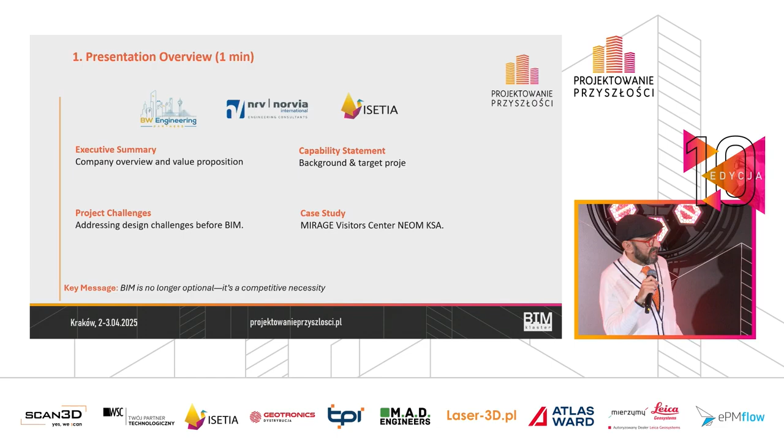I will go quite fast through the presentation and try to focus more on the case study. My presentation will be about 4 areas: an executive summary, capability statement, project challenges, and finally the case study for Mirage Visitor Center.

Again, Bonacci Winwood and Norvia, about 45 years of engineering consultancy, established in Australia, but we moved to the Middle East about 35 years ago. We've done many, many projects. This is some of our areas of specialty, some of the buildings and projects we've done, and this is in our portfolio. And that's some of the structural design we've carried out under BW Gulf in the last 20-something years plus.

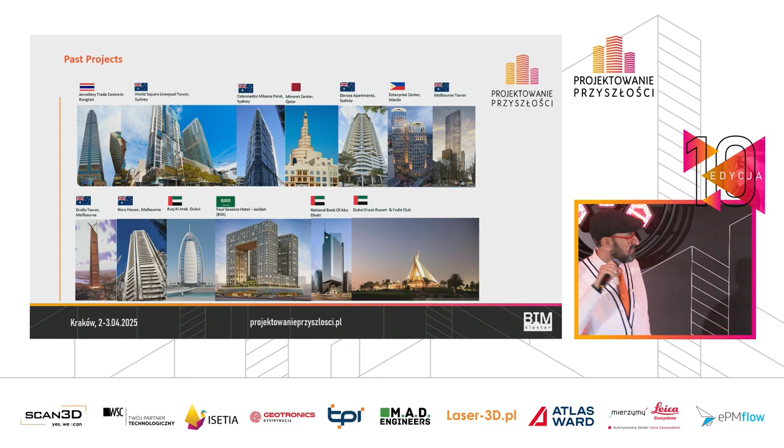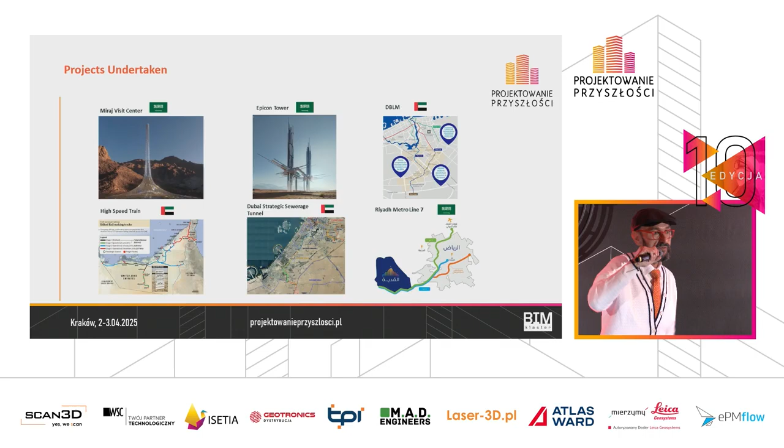This is the current on-hand design we are doing right now in the region. Today our discussion for the case study will be Mirage Visitor Center. And this is some of the projects we are doing right now.

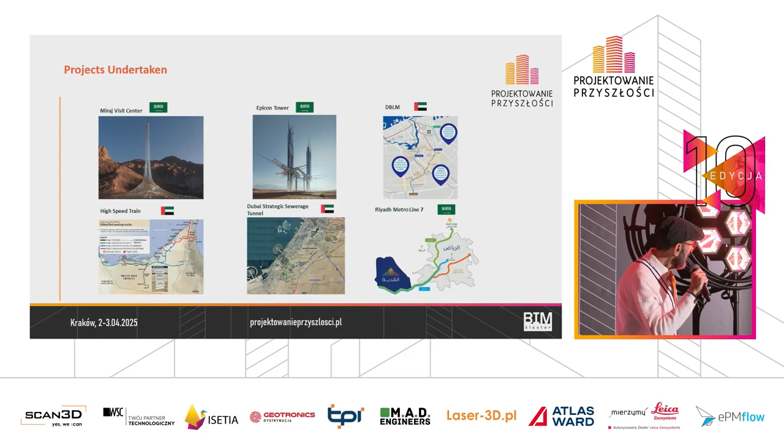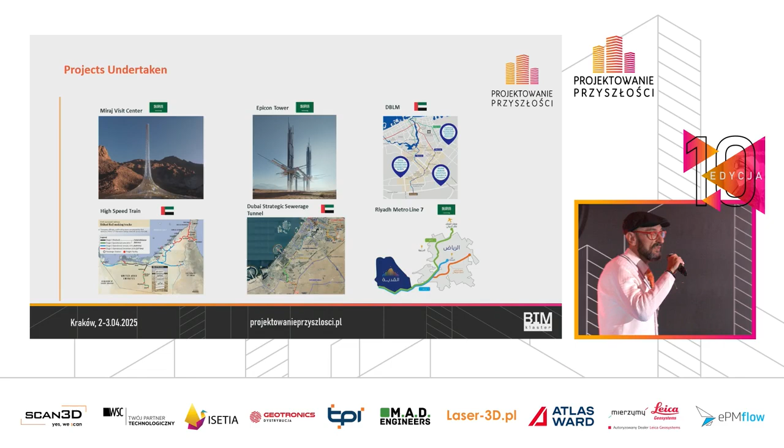We're doing the high-speed railway between Dubai and Abu Dhabi. We're doing the DST tunnel, a very strategic tunneling system under Dubai. And we're doing railway number 7 in Riyadh. Yes, we're doing the Epicon Tower with a private investor, assisting them, and this is part of Trojena.

Being in the Middle East for the last 20-something plus years doing these kinds of projects, we're all professional, we've all worked in engineering and construction. You could imagine the days when we started doing work, the amount of paperwork, fighting, sending emails, telephone calls.

We started with the brick. Who remembers the brick? The telephone, the brick. When it came out, I was the first one to buy it because we wanted to communicate with each other. We couldn't have. Then came the pagers, and before that, the faxes.

So all this, during that time, and then we started being introduced to BIM. It actually gave us a huge jump forward in trying to manage and operate our project, especially during design phases. Because our focus wasn't just on design—we came from an Australian background in engineering, and when you look at design, you want to make sure you could actually build the design you're designing.

It's so easy to put things on paper and then send it to the contractor, and then the contractor's team is standing there asking, how do we do this? What do we do? So you have to put yourself in their shoes at the same time and try to see how you can build and what you can deliver at this stage.

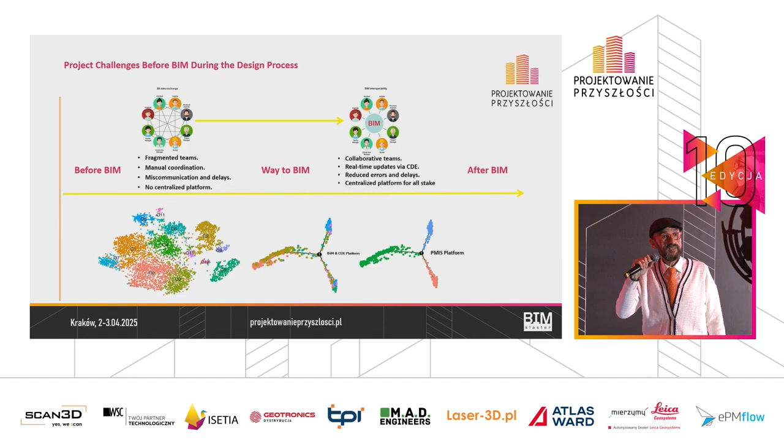Last week he called me and said, 'Bill, you know what, we're struggling. We haven't won a project since last year.' I said, 'What do you mean?' He said, 'Well, because now it's mandatory, part of the government, and in every tender we have to use a PMIS, we have to submit the BIM, we have to do this.' I said, 'Oh well, you told me it was a toy. I said, well, apparently those toys now are going to get us the job.' I said, 'Well, you better start moving.'

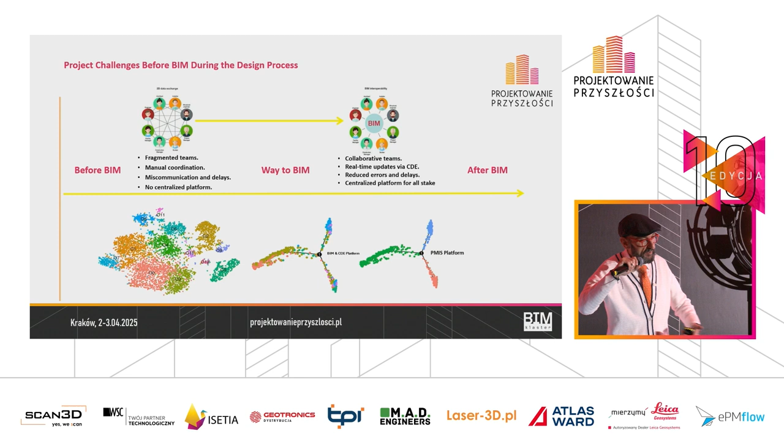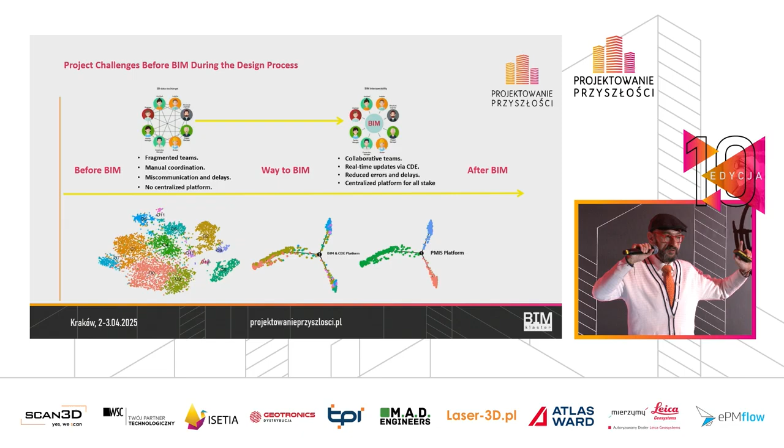So this is a kind of resistance in the culture in the construction industry. Now there are two gaps at the same time. The gap is between what we call an organizationally structured company and a family-run owned company. They have two different approaches to doing things. Usually the one who's struggling is the family-owned operated company, where they have a lot of difficulty embracing or trying to figure a way to move from traditional, the last 30 or 40 years of doing things, to what's been happening right now in the market.

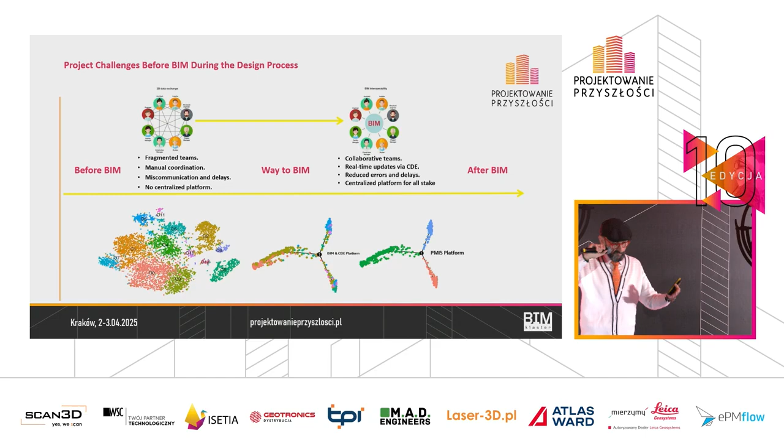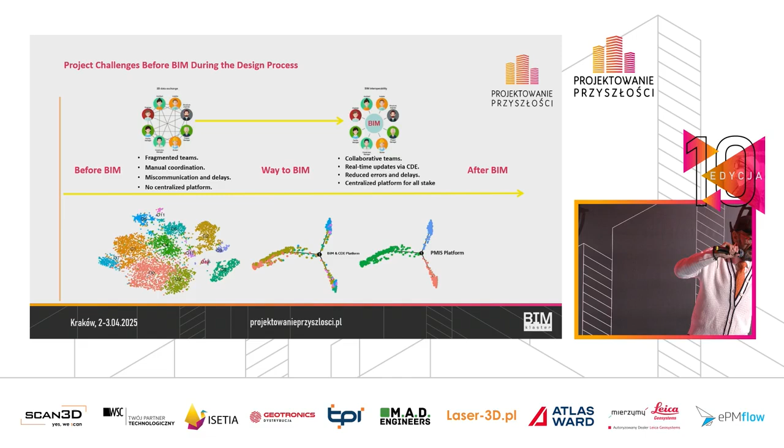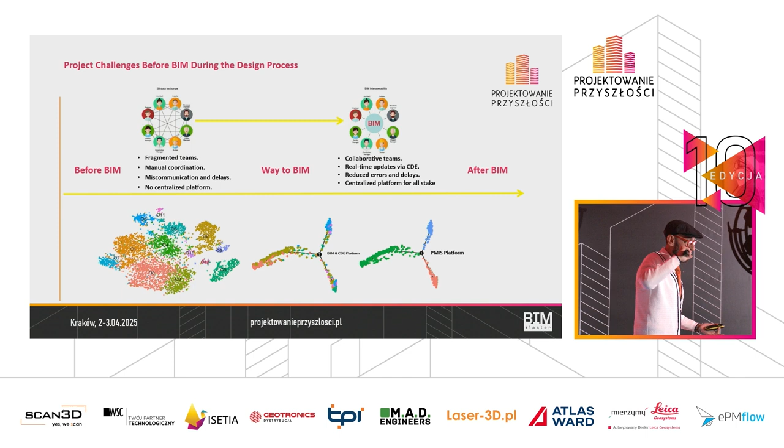I think there's a good opportunity for every business, and even for educational people, to try slowly to help them move on and adopt new technology, to BIM. But at the same time we have to prove to them the actual business case, that they are benefiting. They're going to make money out of that, they're going to save, they're going to benefit. Otherwise they're not going to do it, because they are afraid, and everyone is afraid of changes.

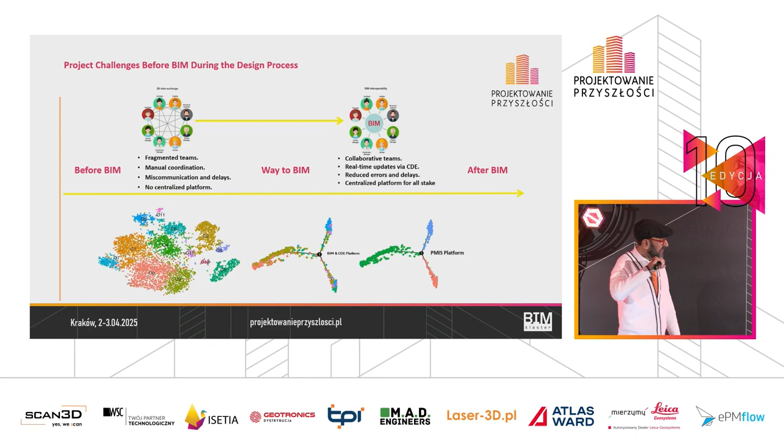This is a little bit of an interesting slide. I use the analogy back in the old days when we have multiple teams and we're trying to do things, and it's all fragmented and clashing. Then along came BIM. Even people said, oh, BIM we can solve it. No, BIM cannot even solve the problem for you. On top of BIM, yes, you could visualize things, you could design things in 3D, but again you still need to put this in a common data environment whereby you have everyone communicating, talking, exchanging, seeing, and updated instantly on what is going on in their project.

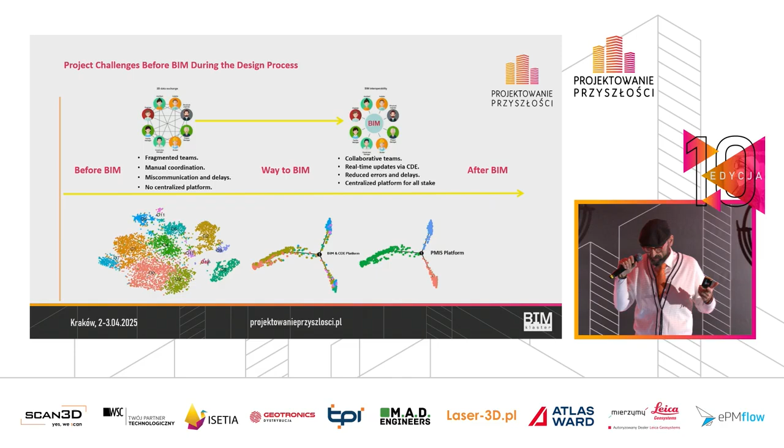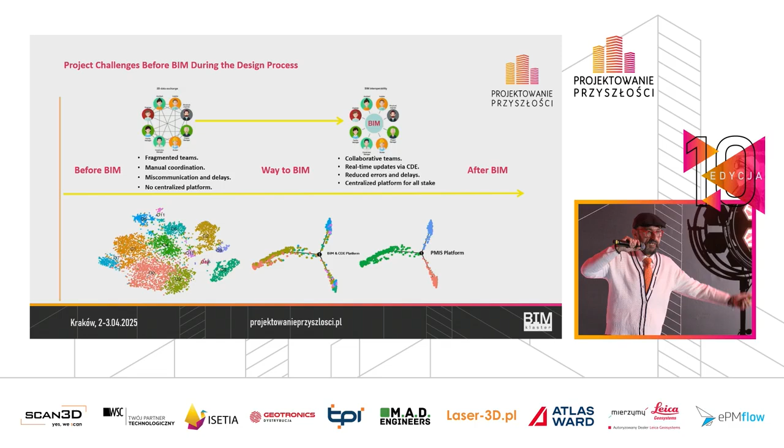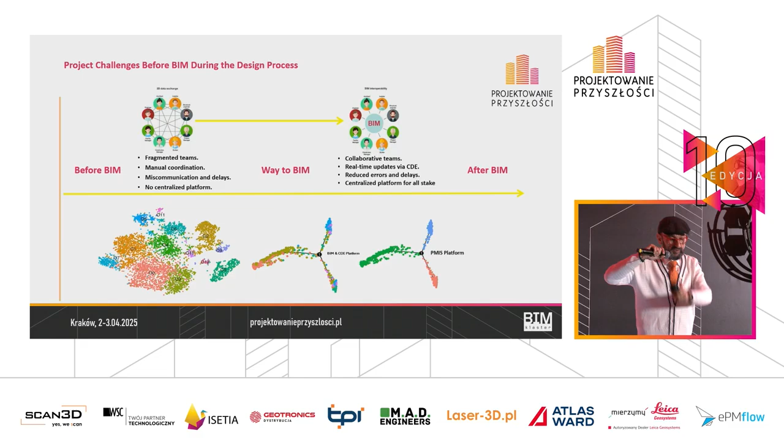And that is one of the most important parts right now. Because look, we're living in a world, it's a planet, it's a big village. I have a team working with me from Poland, with Tekin in Poland, Portugal, China, Iraq, Australia. So we're all working on the same project. By the way, I live in Dubai, so I could work for both time shifts. We try to put everyone 24 hours on a single project, and continuously we're receiving data, continuously we have updates, 24/7. We're getting drawings, we're getting things.

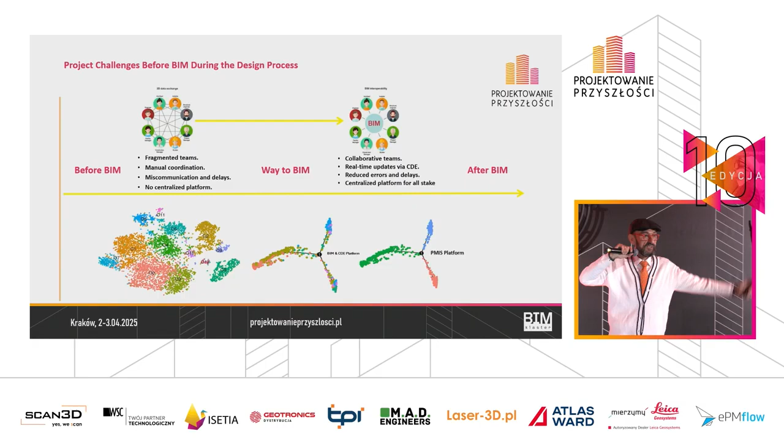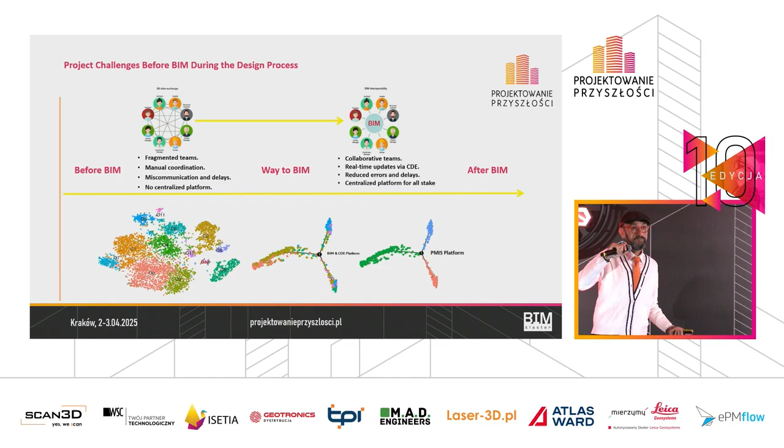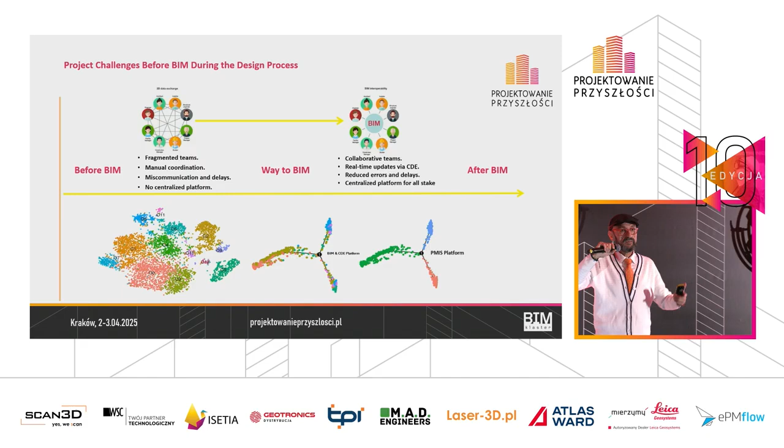But again, if you are getting this through your email, how are we going to manage this? So again, I mean, you need a very powerful PMIS solution to kind of manage and put things together for you. So when you wake up the next morning, or you send it to the client, everyone says, oh, okay, it's done. That's what, in the last about 5 years, we have been pushing, and we've done a couple of projects through this.

Can we go to project detail, because your time is finishing almost? Okay, all right, okay.

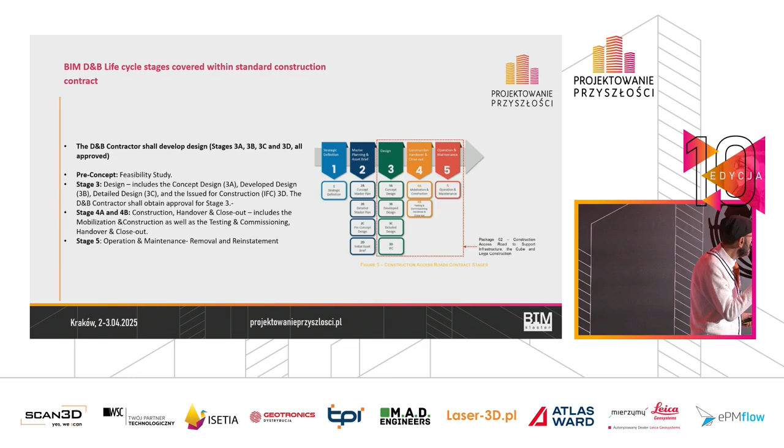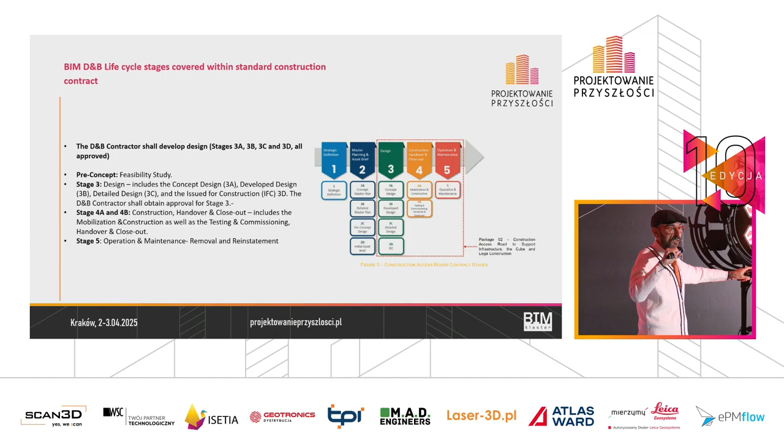This is the BIM standard implemented in KSA by the government, which every contractor has to follow throughout the life cycle, from tendering to execution and O&M.

Okay, I will go directly to the case study, which I think is the most important part. Currently, we are working with the contracting client, tendering for this marvelous piece of steel.

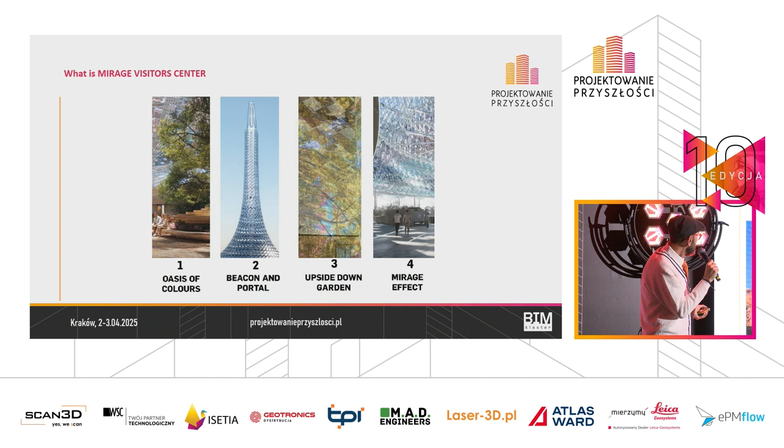It is 2,800 meters above sea level up in the mountain. The height of this chimney, it's called a solar chimney, and it actually sucks hot air out and brings in cold air. It's 172 meters high, with the central ring about 118 meters in diameter.

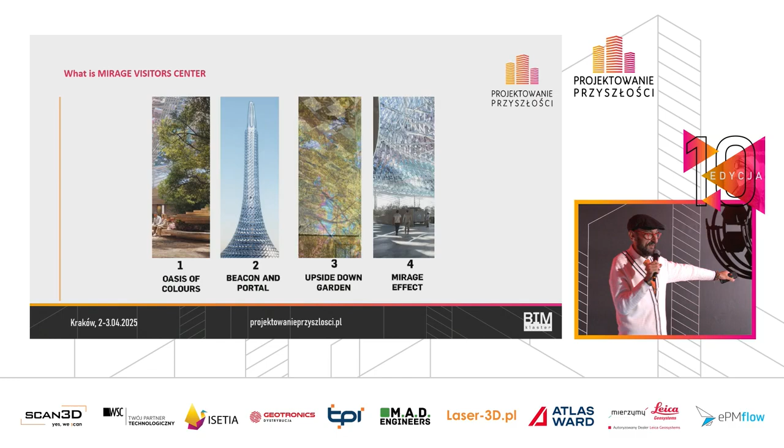The whole idea is to have kind of an oasis from the inside out. This is basically the visiting center whereby everyone will come in and go through this to Trojena, where they are holding the Winter Olympics now. By the way, it snows over there in Saudi Arabia.

Using BIM and using PMIS, we are managing these individual pieces and pricing for it piece per piece. In the old days, we used to take it, send it to our steel contractor, and let him price everything for us. Right now, we're looking at each piece of steel that we're fabricating.

We're sending some of them to China, some locally, and even to Turkey, in order to get better pricing from everyone. Because we know, for example, if we fabricate certain elements in KSA, it's going to be more expensive than doing it in China. So we're picking out those individual elements and sending them to China, and we are managing this process. In the old days, no way - you just packed a drawing, sent it to one contractor, and the contractor did everything by themselves.

Even right now, we are looking at the cable. The center mass of this building is held by cable - there's actually no columns. So we're using a cable system to hold the central mass of this tower, which is 5,000-something tons of steel.

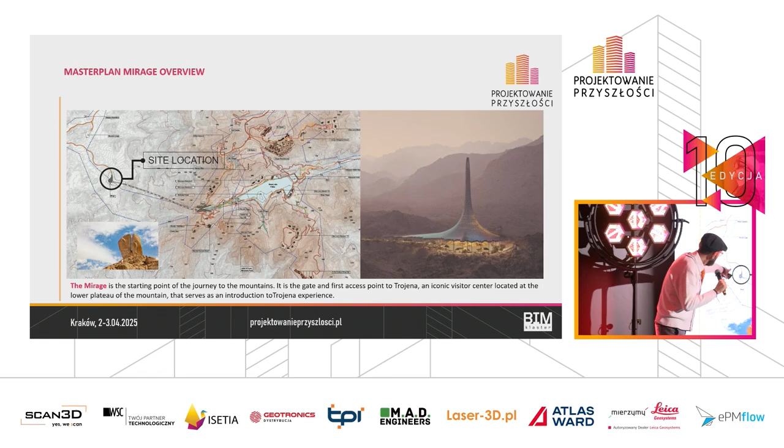That's what we are utilizing, and BIM is assisting us in doing this. This is some of the other projects around it, and this is the project location. There were another 5 projects in the same mountain around this.

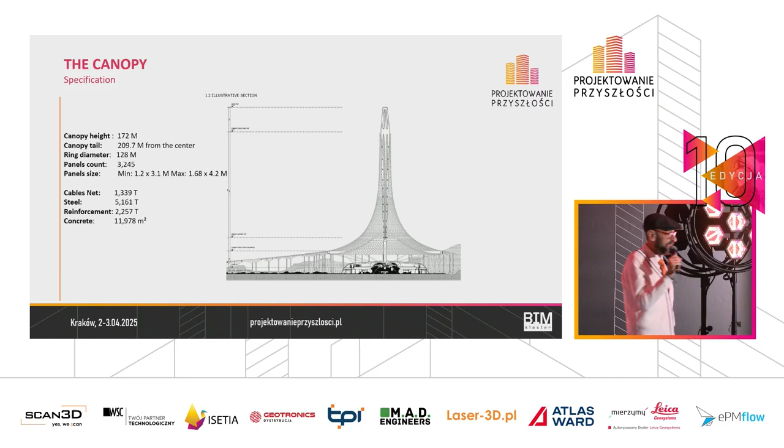Another challenge is transportation. Currently, most of the infrastructure is under development, it hasn't been built yet. One area is we're actually using BIM to figure out how we can construct this - either we break it into 3 pieces, or we do it as 1 piece and use a helicopter lift to put it in place.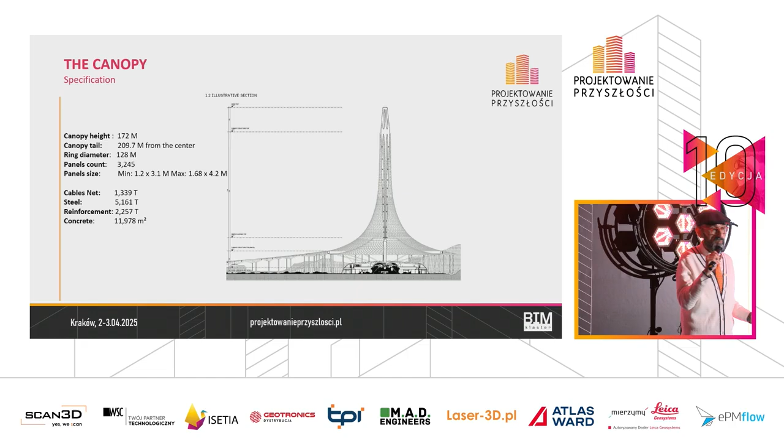We're trying to target saving almost 6 weeks by using this method. But again, we're comparing the cost for both methods, in terms of having it in 3 pieces versus just using a helicopter lift to take it over as 1 piece.

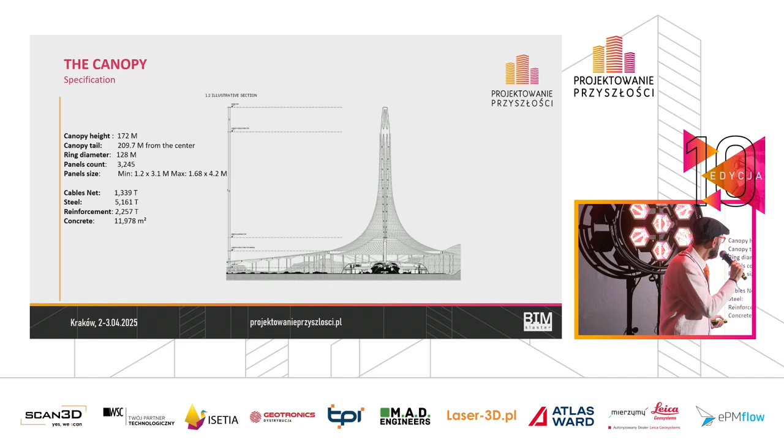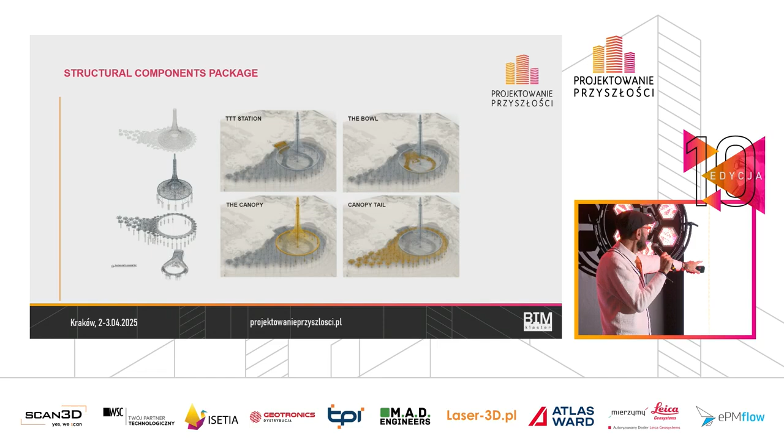This is how it's held, with a suspension cable, and the outside ring. This is some of the methodology statement we are using, trying to test a few things out.

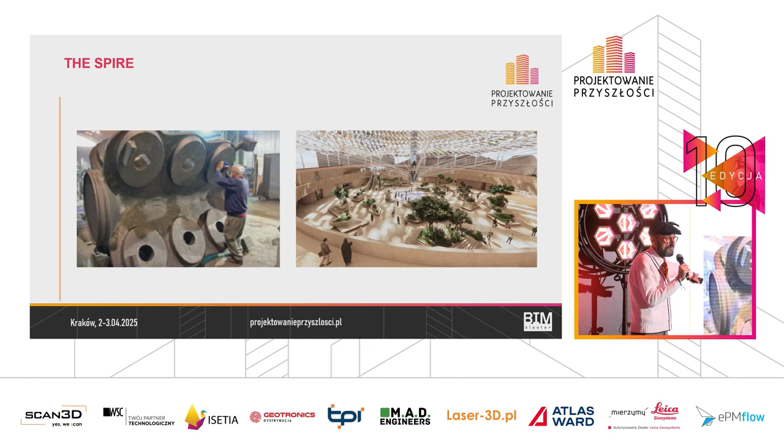This is to give you a human perspective on the central mass of the tower compared to a human. When you look at that from a 3D point of view with these things in the air, you can get a sense of the size of each piece of steel.

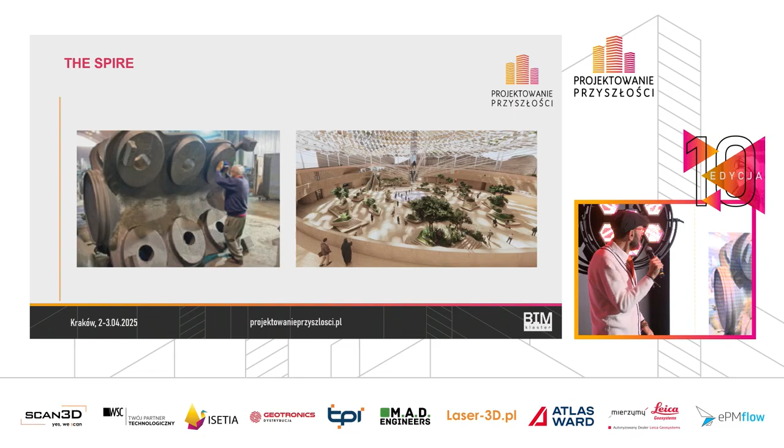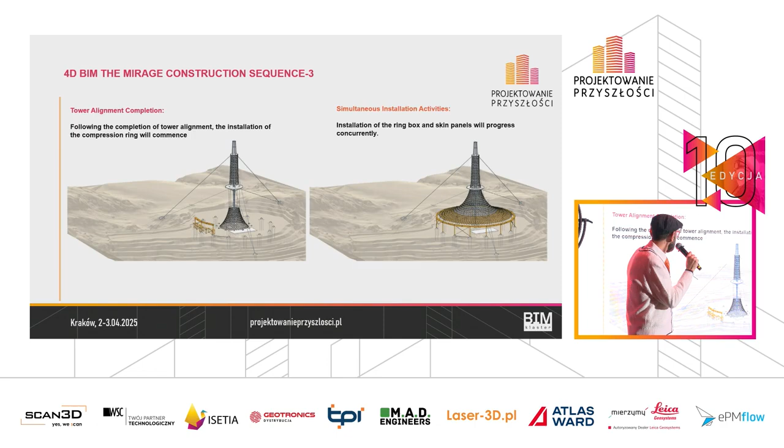This is currently us running some modeling for constructability and trying to put it into different pieces.

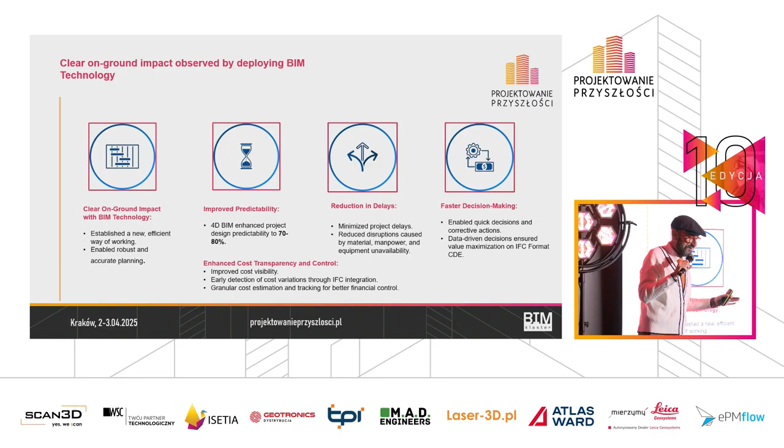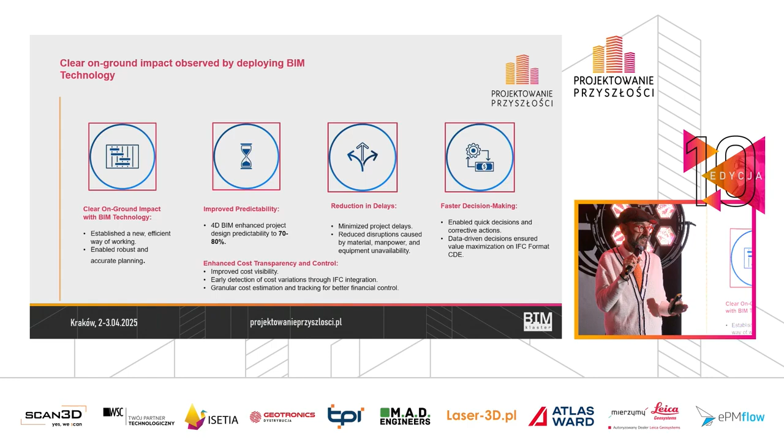Finally, one of the biggest areas we're always pushing for is not just cost saving, it's actually time. The biggest problem in KSA and all these projects is the client isn't talking to us about cost anymore. They're saying, we're committed to a deadline, which is for the Winter Olympics. Can we do that? Can we finish it? So for us it's about coming back with a different way of trying to visualize things.

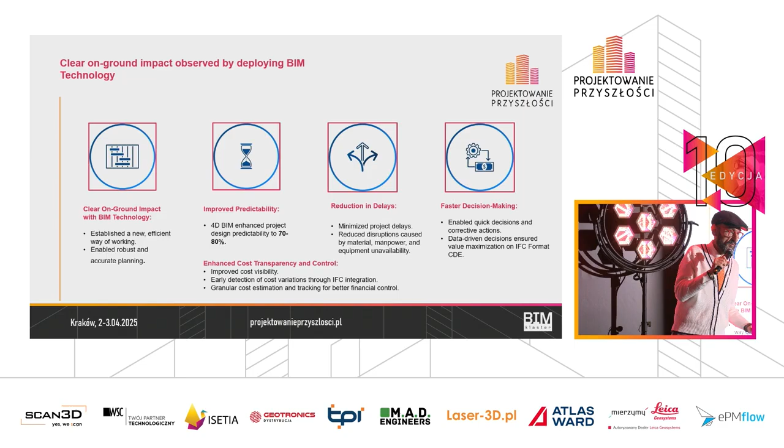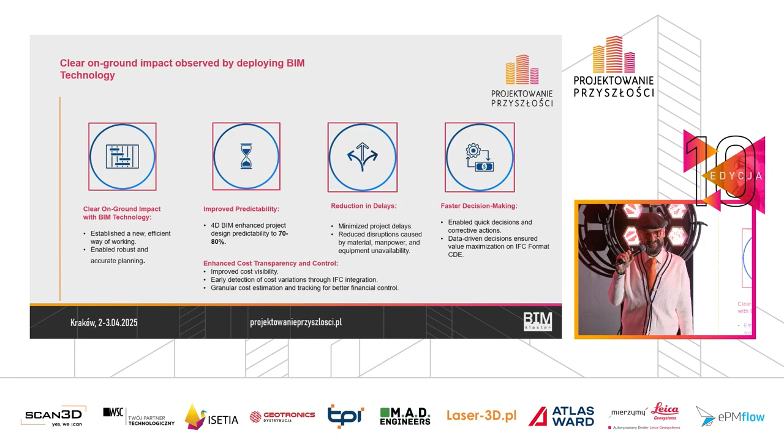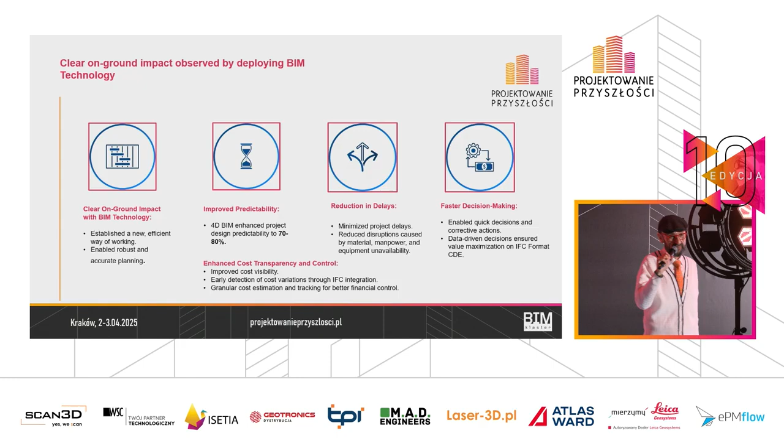But they should have winter before the Winter Olympics. Tekin, this winter in Riyadh we had minus 3. Wow, remember when I called you and told you? Don't say something like that, people will be shocked here. I'm talking about a city that hit 55 degrees in the summer. Yes, the weather is changing.

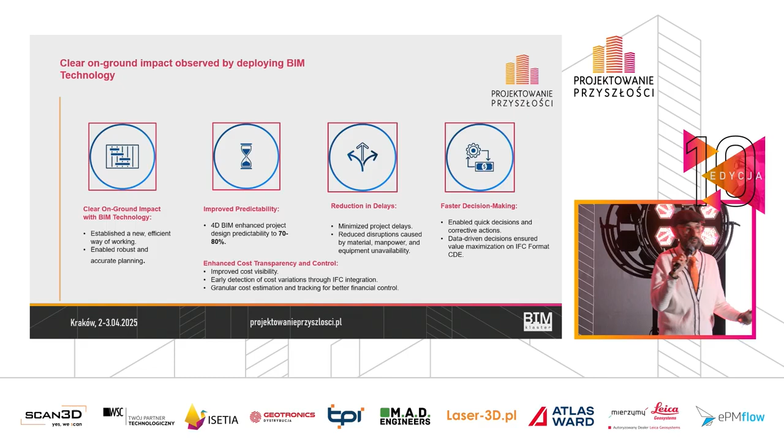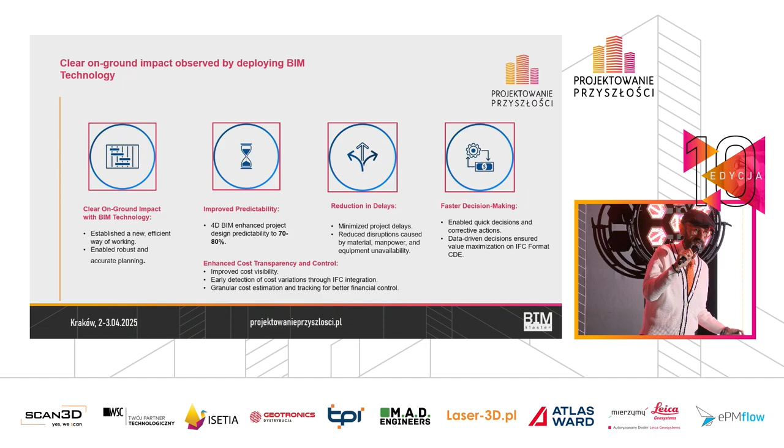Anyway, the biggest challenge is basically to have things done on time, or even faster, and that's our push right now. We are utilizing BIM technologies, different ideas, different solutions, different techniques, in order to figure out how to build things and even design things faster. Not just building it, even designing it faster, because it all relies on design too.

PMIS is a next generation of CDE, because we work with the common data environment, BIM common data environment. PMIS is now obligatory for many government organizations, which is all integrated data, not only 3D but including 4D, 5D. That's why I said it's got 600 applications. Actually this is not about 3D modeling, it's more about this project.

Tomorrow I'm going to have a 2 hour workshop. We have over 1,000 pages of BIM execution plan. I'm planning tomorrow to show Dubai Metro, NEOM, Istanbul Airport, and JCDC Stadium. So for those 4 projects' perspective, we will be running a 4D and 5D workshop, showing more detail like challenges, design documents, how prepared worldwide design companies and construction companies are before starting a project, how they prepare the documentation.

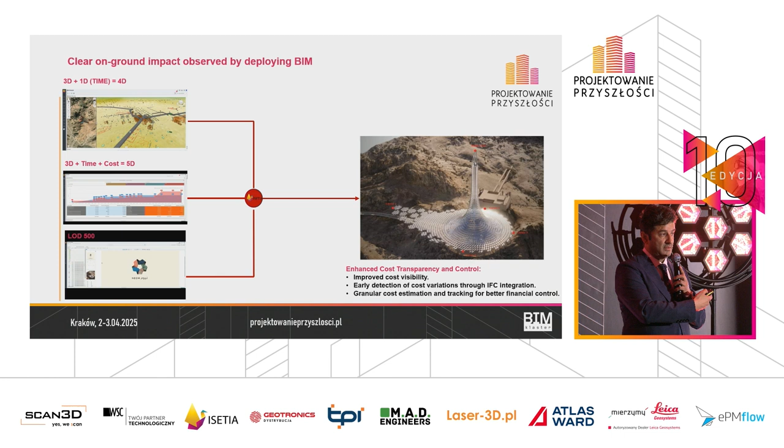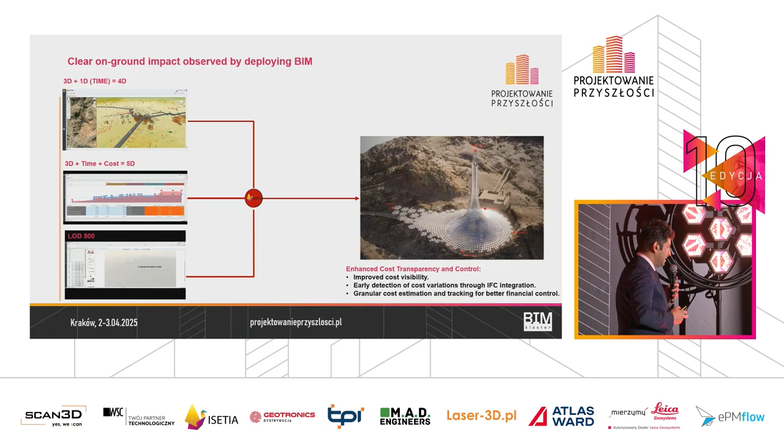And I have live data which I can share, the Revit model, IFC model. The point is that in this project, majorly, you can see down here the LOD 500, this is the 500 pages of documents, some of which Bill was showing you, all the details of elements have been developed and explained in the document, which is very important before starting the tender even. So before tender, all design, all documentation was ready. This is very important, not like after starting it.

Of course, they use the dashboard reporting, because we have VDC and all the model automatic takeoff will give the logistic plan, procurement plan, construction plan, BOQ, and even project finance cash flow in the system.

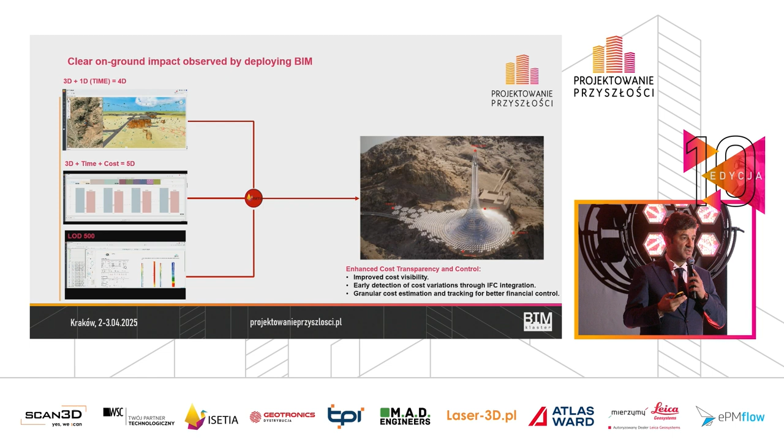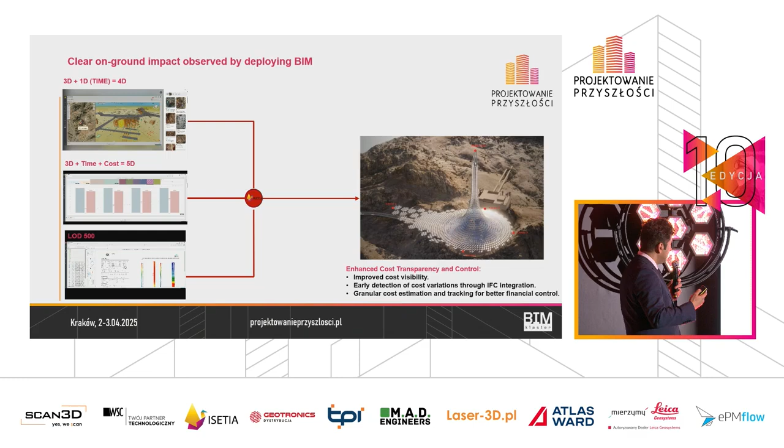The next one, this is a place in the middle of nowhere, and I was shocked when I went there. I realized there's no hotel. You're building construction facilities and the nearest hotel is 200 kilometers away. So they have 5-star containers, something like this. That's why we use the technique of opening the model in GIS, all the connections, all the things in one platform. And tomorrow I will show how the QR code, Google Lens, and all the latest technology we were using.

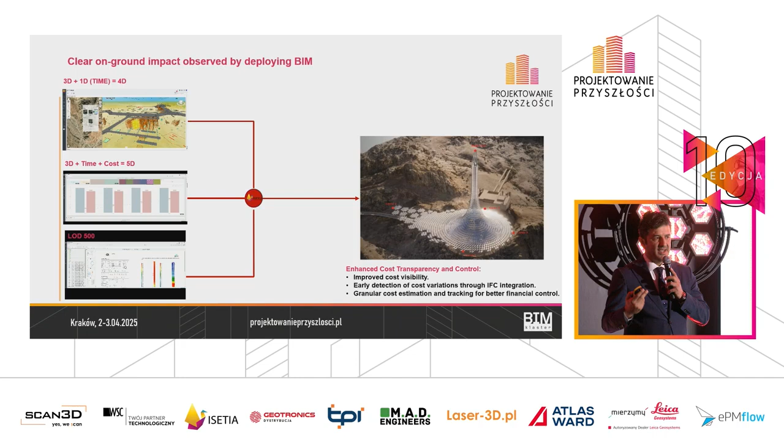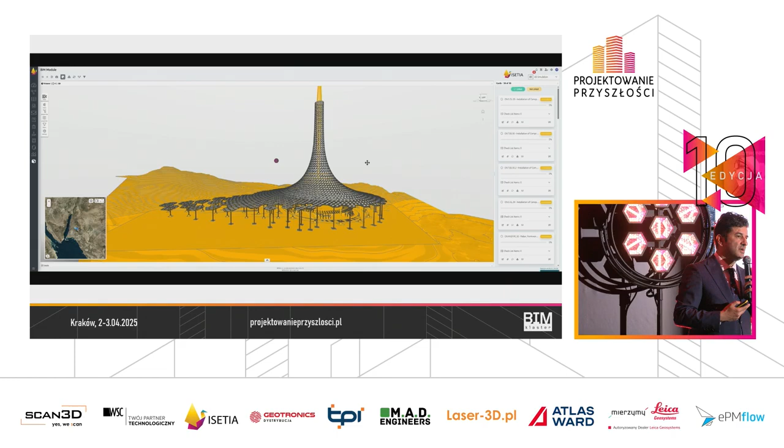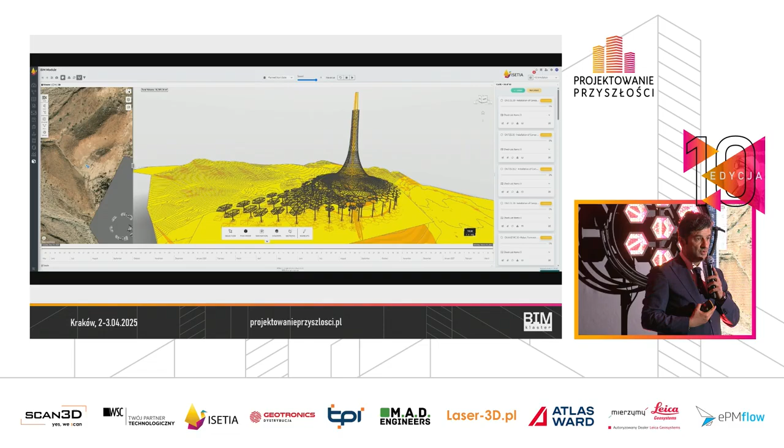The major challenge was scheduling construction work, because as Bill mentioned, their design, procurement, and installation, and in the middle of the desert, they planned everything but forgot how they would bring the cranes. This is a very big construction, and they had to build a road to be able to bring the special crane to do it. As a technology, we integrated GIS so we're able to open the model in the map and run the construction simulation program, which, when you integrate 3D with time, makes you a 4D enabled organization. That's why this is a sample.

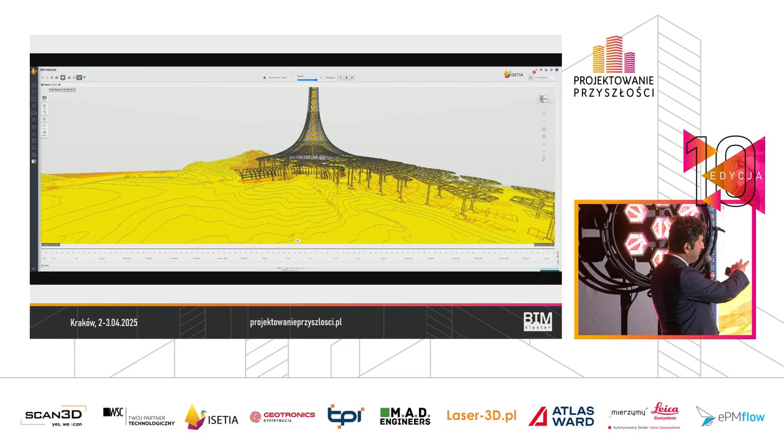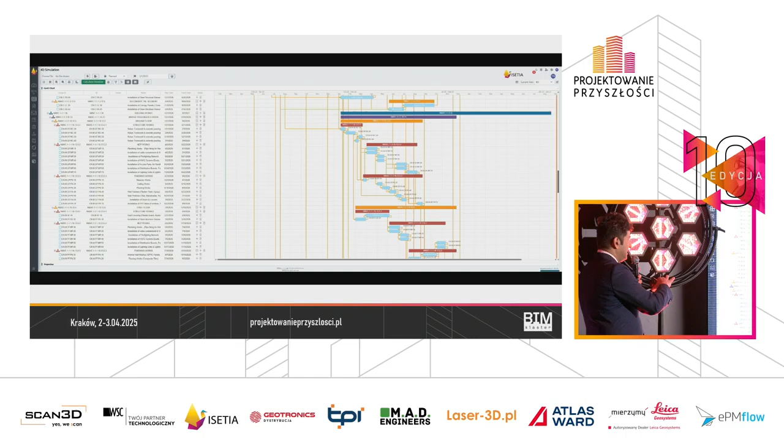Tomorrow we will build from zero to end, from 3D model, how we can take off, how we can link the schedule, how we can run the 4D simulations, and in the live experience that we will be sharing with you, this kind of simulations.

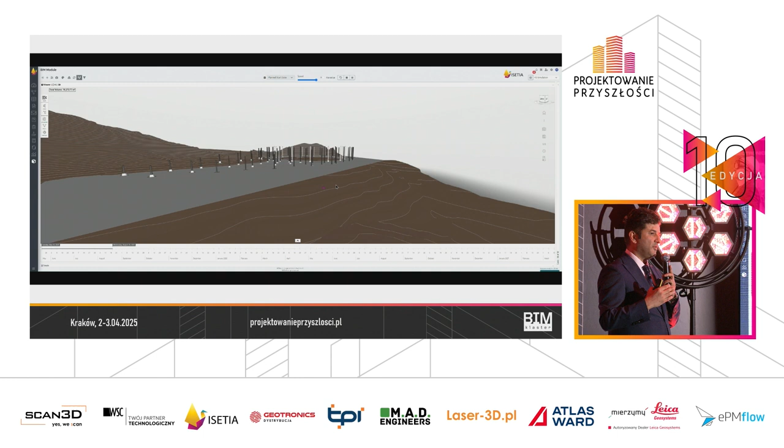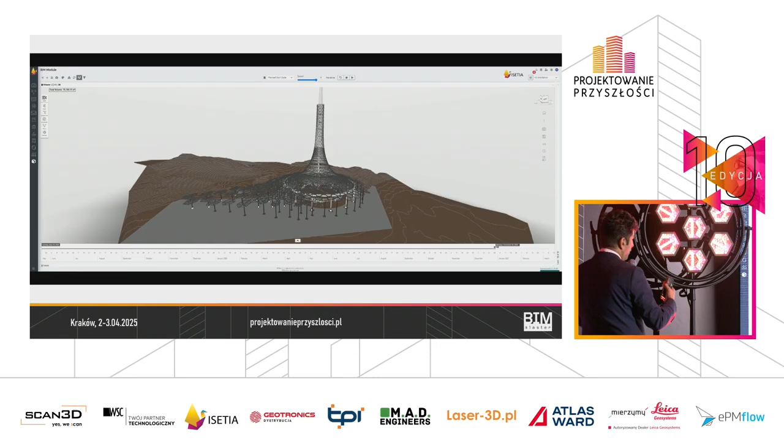This is not like Navisworks, where you are running the design. This is more about integrating cost, integrating schedule, seeing the critical activities, tracking the material - is it ordered, delivered, installed. All these important parameters you will be able to see tomorrow.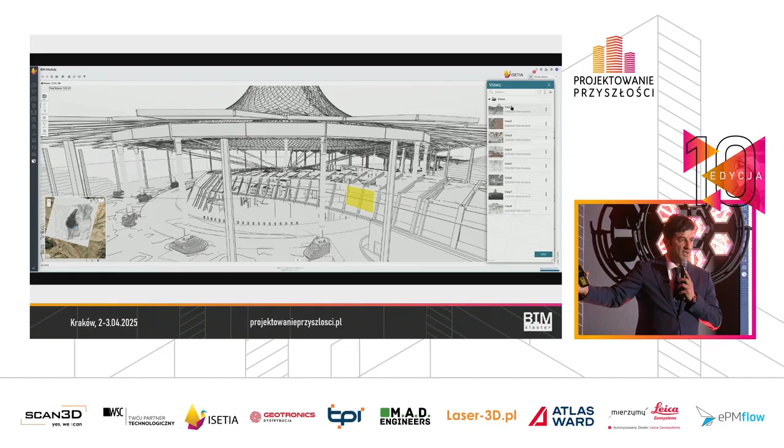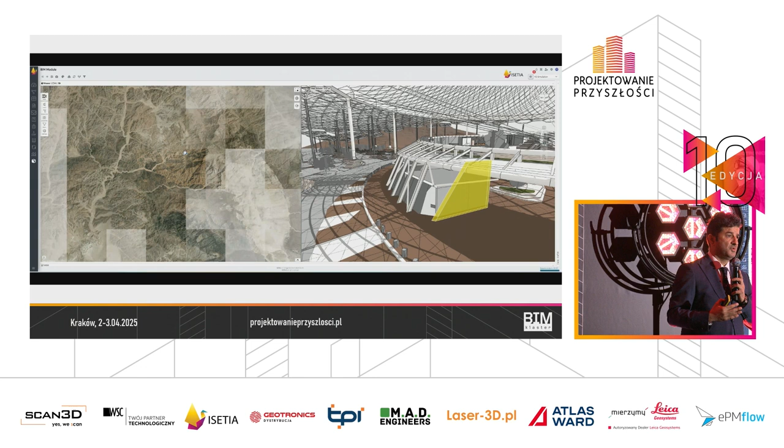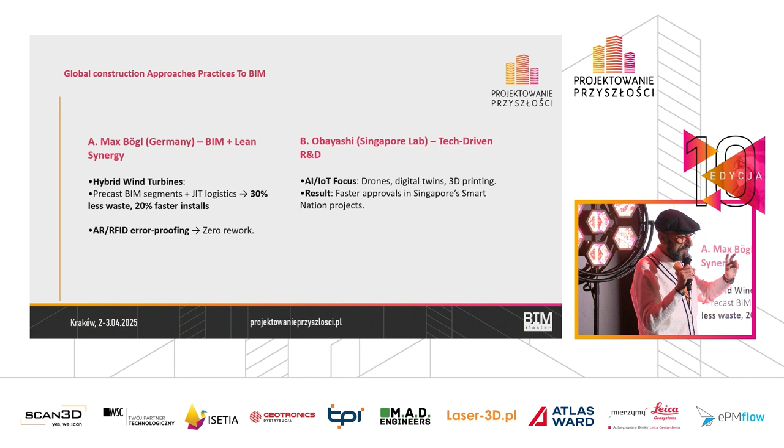The last thing I think you want to finish, because we are almost out of time - in the last couple of years, we've been following the construction market both in Germany and in Japan. Recently, I've been following two companies, Max Bögl from Germany and Obayashi from Japan. Both of them have created their own methodology, their own way of actually using BIM, trying to figure out how to utilize BIM for the maximum benefit of their project.

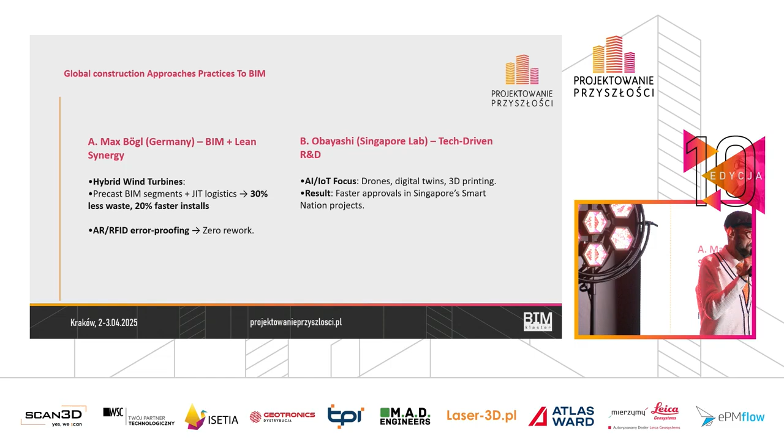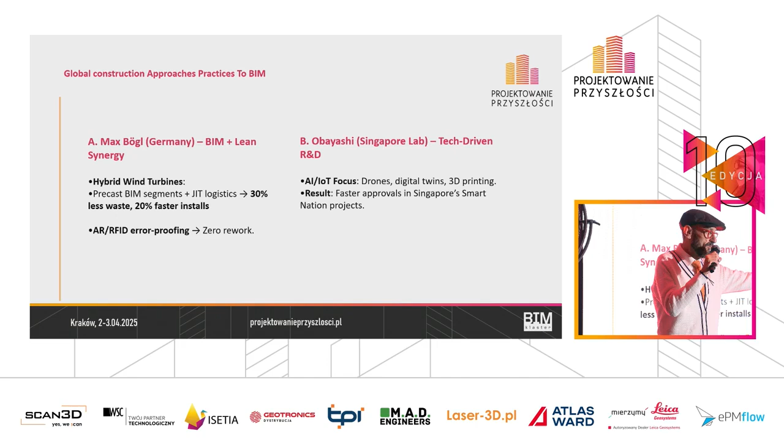For example, Max Bögl combines BIM in order to achieve what's called lean engineering. At the same time, the Japanese company Obayashi has created a virtual constructability center in 3D, whereby before they go on site, they train their project managers to actually virtually build the project before they go. They spend 6 weeks in the training center going through the projects, virtual building, before they start building. So this is some of the future, what people are heading towards and experimenting with right now to move construction forward.

I would love to have this kind of thing in Dubai, but I think it's quite out of our budget right now.

One of the biggest challenges right now - I see it not just in the Middle East but around the world - is basically in terms of BIM, there is a big cultural gap in terms of people in the construction industry trying to adopt it. Secondly is training - inadequate training and availability of people accepting the technology.

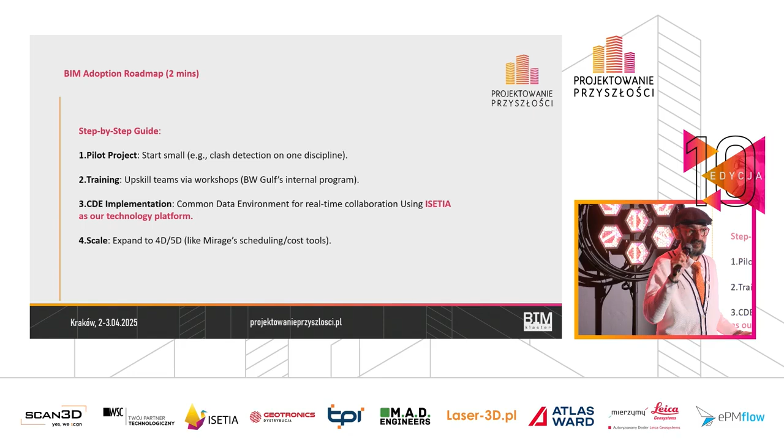And finally is governmental policies. I was just talking to Tekin, and he was saying here we have multiple committees, and committees could go meet and discuss. I said, okay, and then what? Oh, then we disagree and we agree, and said, okay, that's 5 years, 6 years. Cool enough. And I was like, no, you need a social dictatorship - this is how it's going to be done, take it or leave it.

And now in the Middle East, every time that you open up, there was a section that says BIMIS - you have to define who's your BIMIS, what you're doing, how you're managing your project. In some instances, like Dubai Metro, the guys were so happy with Hexagon they could not name Hexagon in particular, but they kind of pushed the tender in a written way that we are forced to use Hexagon because we supported a couple of the consortium and we tendered for the project too.

So again, it is right now mandatory to submit all drawings on BIM. For example, Dubai Municipality or any authority in the UAE will not accept any submittal - it's all done online. You have to be in BIM, plus you have to prove to your client or the government or semi-government or whoever that you have an adequate BIMIS solution in order to integrate and build their project. I think that should be mandatory right now in the construction industry all over the world.